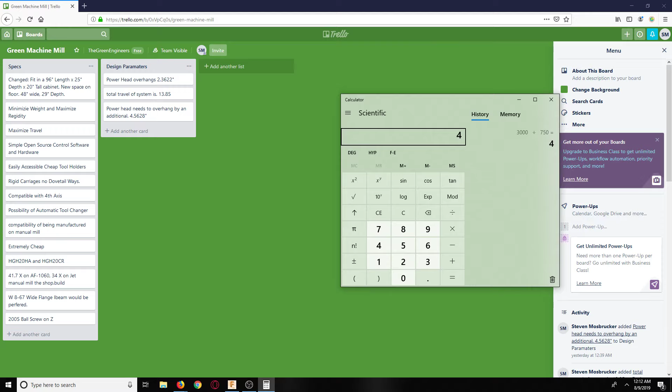And I think this power head, what was it rated at? Actually, at 3,000 watts or 4 horsepower. And that other one was 48 volts times 70 amps, which is 3,360 watts, which divided by 750 is a little over 4 horsepower, about 4.5. So obviously we'd need something bigger than that 3,000 watt to run the rest of the motors, so maybe even a 4,000 watt power supply.

I'm thinking even maybe like a big battery bank or something. But the next option, the transformer switching power supply - oh, these are 12 volt, that's too low. This one, like that one right there, this would be perfect - oh, it includes free shipping. So, oh, and then this is probably no - what is this?

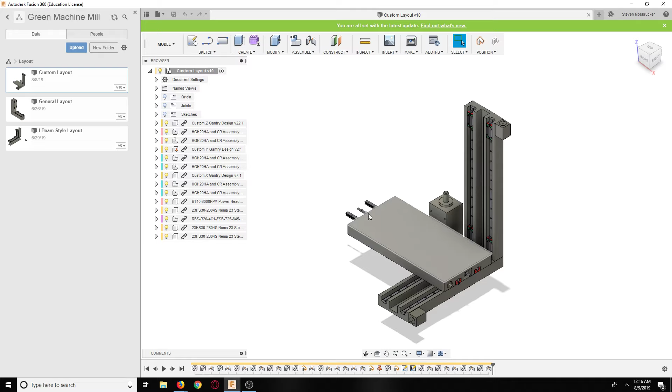Anyways, let's go ahead and look at what we could do to get that extra step over. I still haven't gone in and changed these yet, but we don't necessarily need that right now.

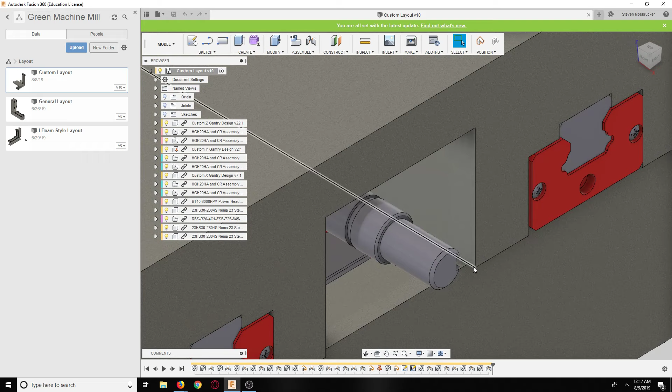For this guy, I would definitely go consult with maybe the HIWIN guys to figure out what to do here. Obviously I could machine something and stick it in here to hold the bearing and hold this guy, then have this stick out over here somewhere, and have this go up to this, with the bearing in here with some support, and then 2 holes drilled down here, and screw the block in there.

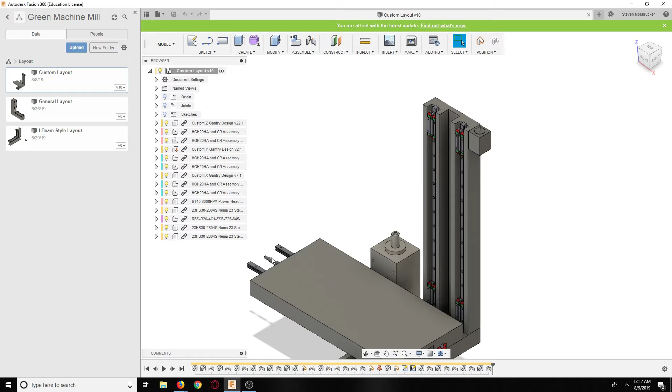Same deal here - this guy goes over here, and I could consult with them about what to do there, because I believe they're just regular steel. So even if I had to cut it and turn it down, that's fine also. It doesn't really matter, but I don't want to pay extra for increased machining time that I don't necessarily need.

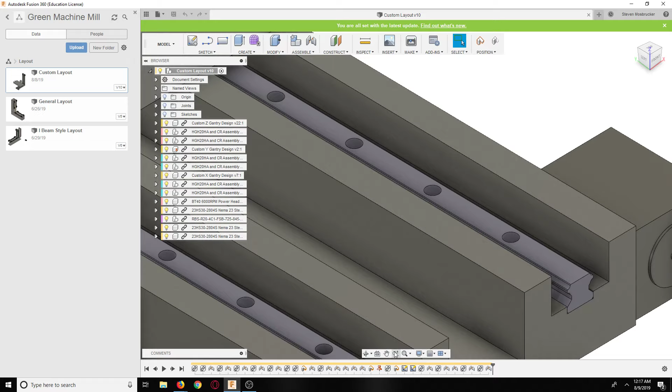Like I said, this needs to go up a little bit, because we have this, and we need these pieces to clear. Or we could come in and recess that 1/4 inch a little bit so it sticks out. It's not that big of an issue, and that will leave more meat. Actually, we'll bring these up - it'll leave more meat in here anyways.

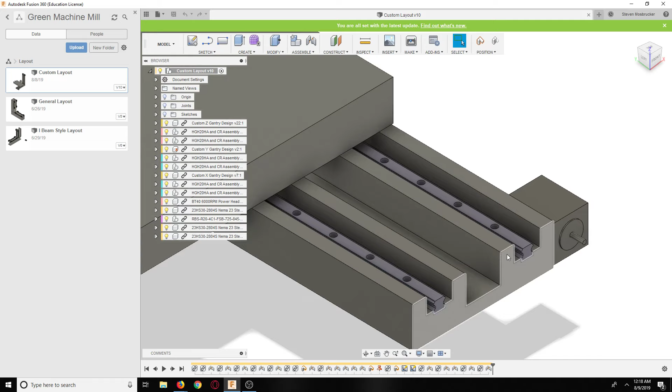So that looks good, let's go ahead and look. This is kind of touching right on - I guess this is the seal piece, so technically that will be that way, but it might be taller or shorter. I'm gonna have to ask them about the tolerance.

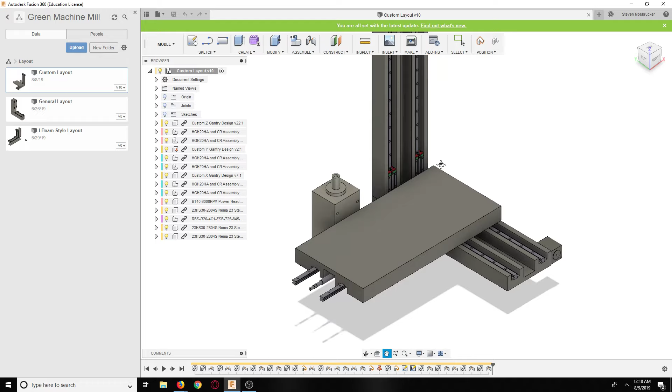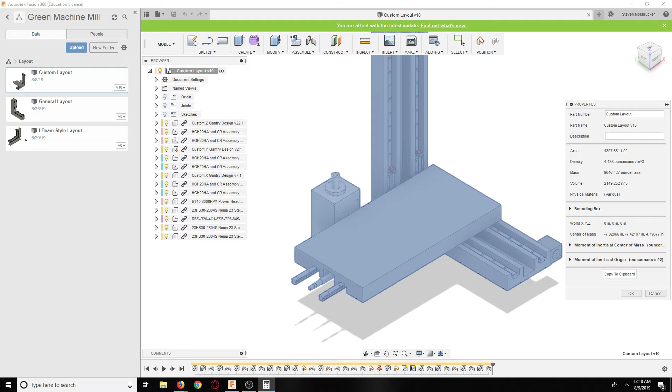So, here we are at properties. We're at 9,646 ounces divided by 16 ounces per pound, that's 602 pounds. Okay, so now we need another 4.5628.

So now the question is - a 2 horsepower spindle, including VFD, it's a 2400 watt spindle. So obviously we need to step it down quite a bit, and it's got way more bearings than we need, because really we don't need a spindle, we just need some sort of...

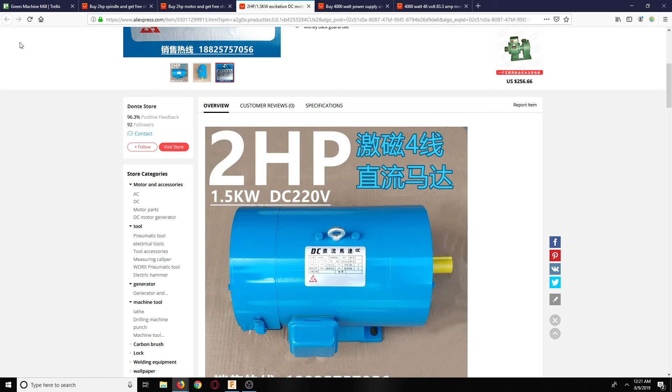That's not going to work. Let me bring this over. Oh, it's the same way. There you go, treadmill motor.

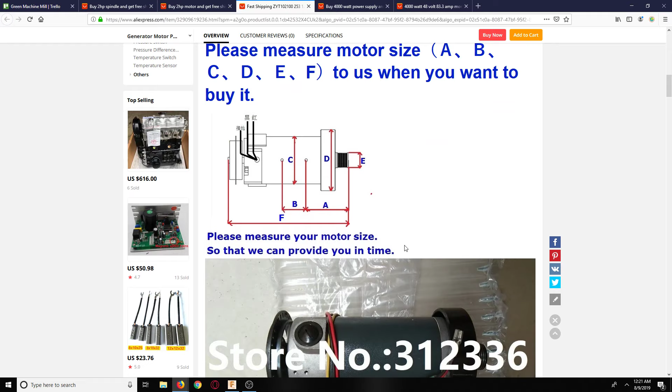So it looks like it just goes here, but I do like this idea. A treadmill motor, that's interesting. Where'd that go? That was there or something. That's only 1/2 horsepower.

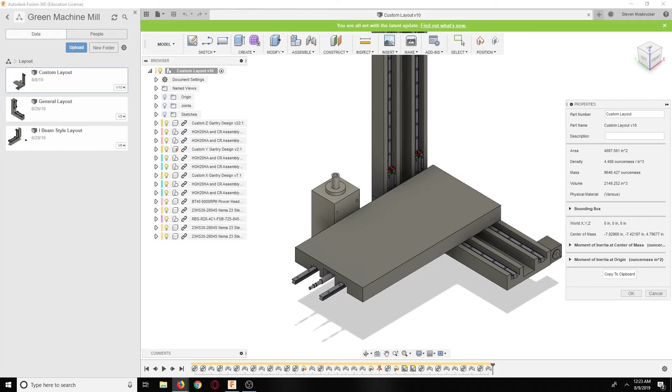Best is probably to use the spindle motor. I mean, we could design for that right now. Pretty much what we'll do right now is... because DC, I'm not going to do just a regular treadmill motor that's already DC if I could. What if I do an AC 2 horsepower motor?

So yeah, again, it's giving me the treadmill motor. But that spindle motor will give us a lot of power. But again, we don't need all those bearings in there. Okay, what about a 4 horsepower motor? Anyways, so a 4 horsepower AC motor's not coming up. Anyways, let's keep going regardless here.

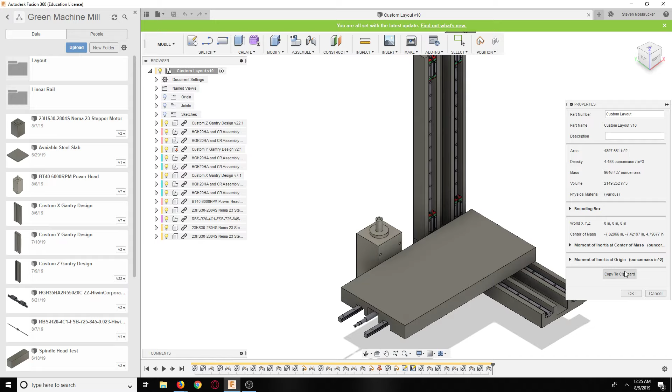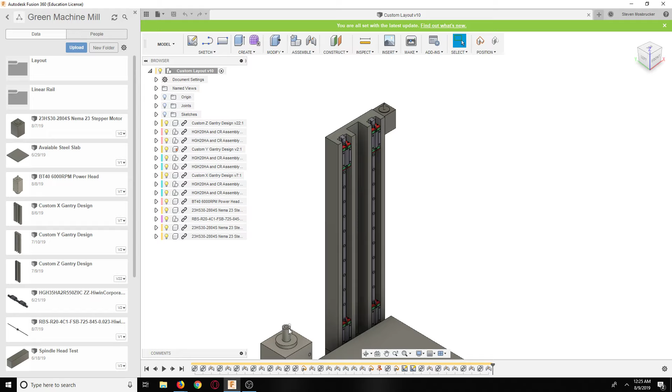So right now let's pretend that we're gonna use a spindle motor, or some other something off of a vacuum cleaner or something, and then driving this guy, because this guy's the one with all the good bearings in it, and we don't need to pay for 2 things with 2 different bearings in it. So let's look here - we need 4.5 something.

So let's just do that, and it's going to be the same size as this guy here, which is 9.843. So basically, it's going to be this way.

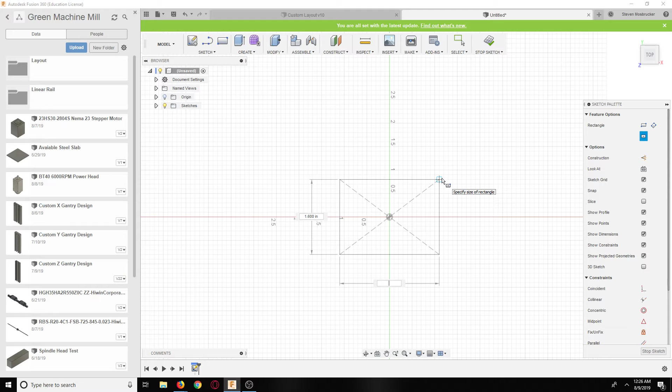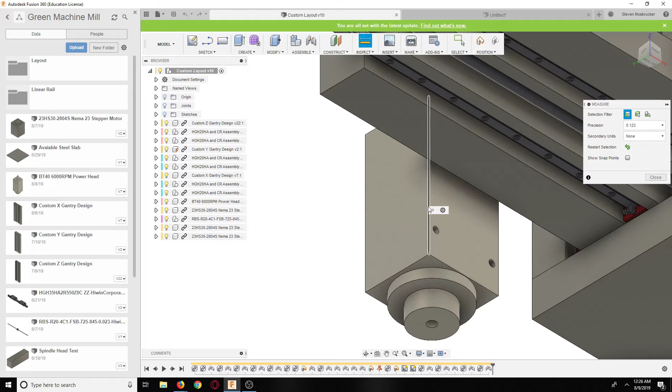Let's do 4.5628, and then width 5.197, 5.197, and then height again is 9.843, 9.843, 9.843.

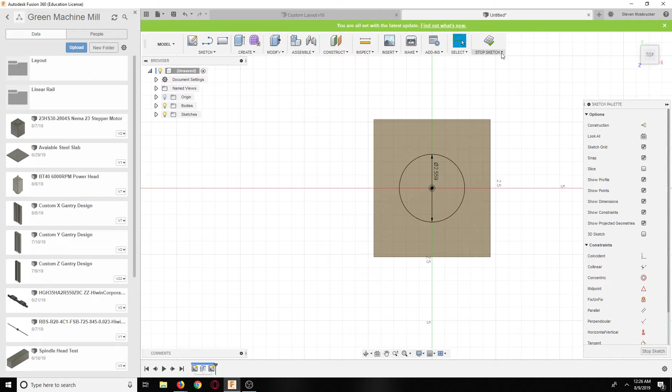And then let's punch a 60 millimeter hole in it - 65 millimeter hole, just for accurate representation. And then that's plenty of area to really suck all the energy out of that spindle, and a lot of support.

And again, so let's look at the 4 horsepower spindle - it's a 3,000 watt spindle.

A 3 kilowatt spindle with inverter from China. Oh man. But this thing's kind of cool.

380 volt. Well, I guess if I'm going to buy a spindle, I might as well buy this one, and then later on when I want to use a different one, when I want to go to the other system, I could just pop this onto some other machine, pretty much, onto a router of some type or whatever.

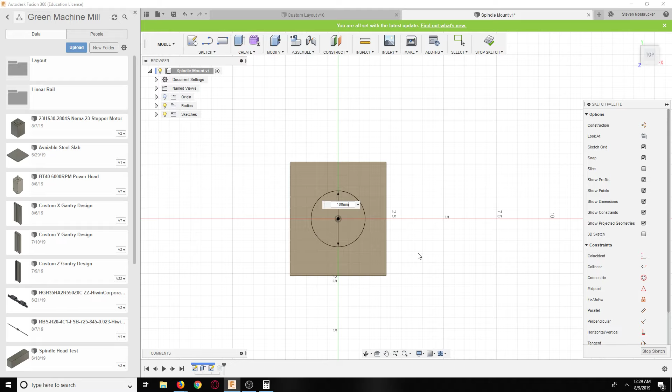It's about 3/8 on each side. That's a little bit of meat. These are... What about, I don't know, plus I don't want to go right up to that rating, that 4 horsepower rating. So let's drop it half. So give it a little bit.

Yeah, so these are 80s. So a 2, okay, so they're 2.2, which is, yeah, 3 horsepower.

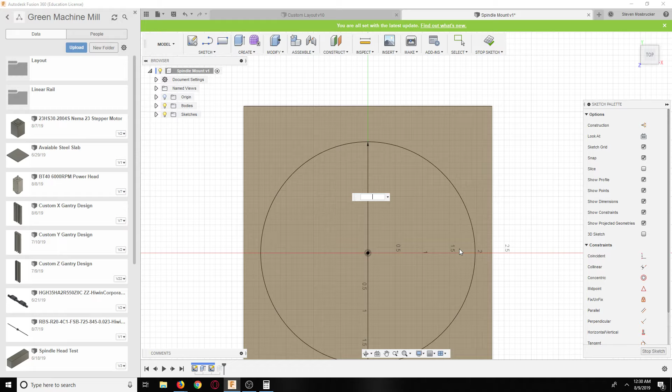And I can run off 110 or 220. I have 220 in the garage, but I don't have 380, so I can't run 380. So let's say 60. Or these are 80 millimeters. So these are 80 millimeters. There we go, that's better.

That's a decent sized spindle. Okay, so now with that, let's say how long it is. Oh, here we go, perfect. Look at this. Nice. You could do 220 or 110.

Ooh, runout less than 0.005 millimeters. ER20, 80, 230, CNC engraver, four bearing, 2.2 kilowatt, diameter 80. Total length sticking out is 12.

Okay, so let's use the calculator here. 12 plus 13.5 plus 191 plus 28 equals.

But there is one issue, and that is that this is going to have to be facing up, and then we have the cable coming out. We'll have to do something about hiding the cable, getting it out of the way, so this thing gets really close to the table. But I think that's not going to be that big of an issue. We could probably jerry rig something, even 3D print something that goes in there.

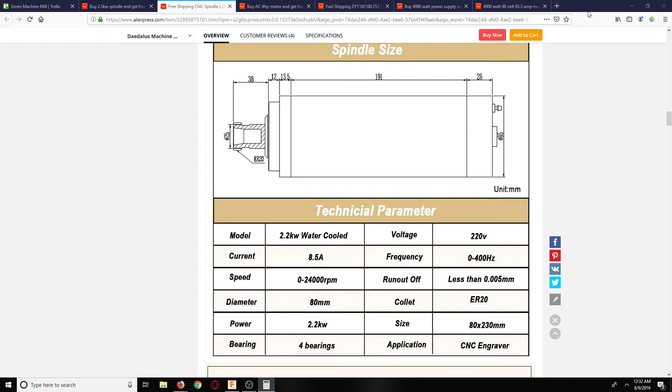Current 8.5, speed 24000. So obviously we need to step that down 4 to 1 or higher. Okay, but basically that's 244.5 millimeters. 244.5 millimeters. Oops. $244.5. Oh, look at that.

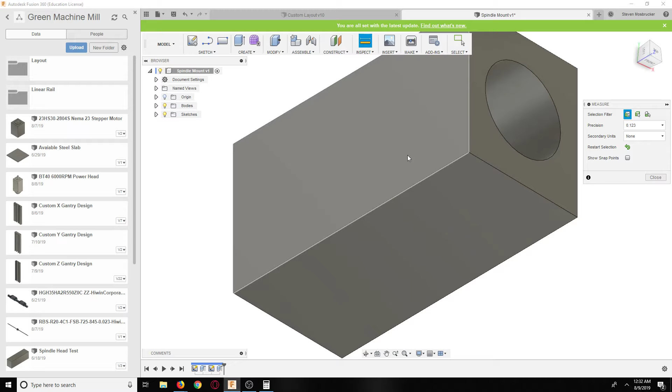Just under what we need. I think this is what, 9.6 something. Yeah, perfect. Okay, so let's design this here. We have 6 minutes, so let's design this as this is one of the first options, I think.

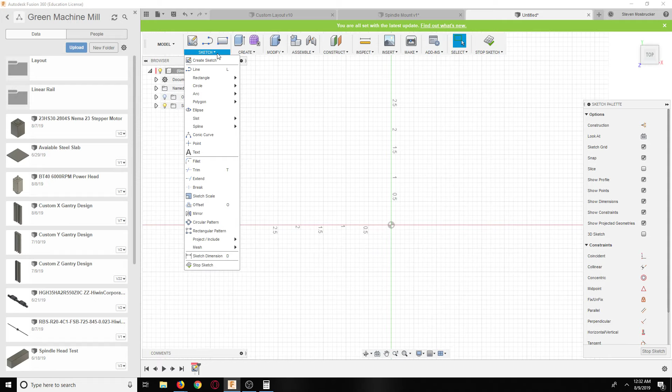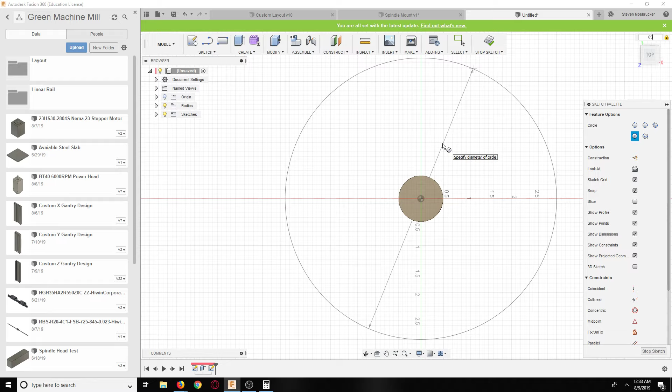Okay, so let's say here this is a 25 millimeter circle, 38 millimeters tall. Then you have a smaller circle. It doesn't say exactly how big it is, but it's slightly smaller than the overall. I'm going to say it's about 65 millimeters. And then that is 12 millimeters tall.

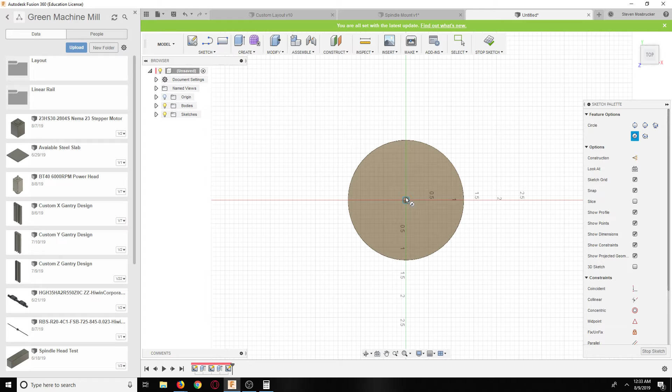Oh, this is the 4 bearing type. I mean, it makes sense. I guess it's definitely an interesting idea about using it later on another application.

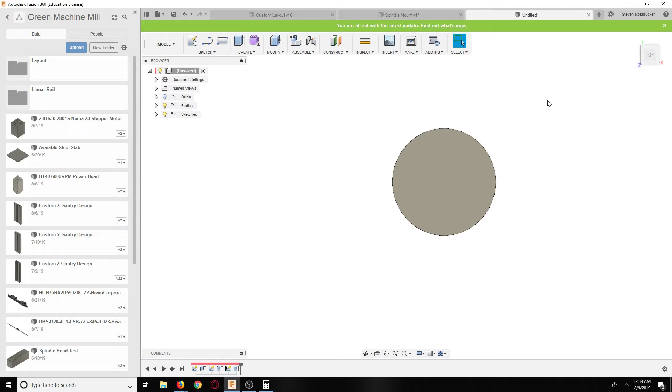This is 13.5 millimeters. And then this is going to go 191. And then this is going to be 28. Oh, this is water cooled. Oh, 80 by 230. I wonder why it says 230. Anyways.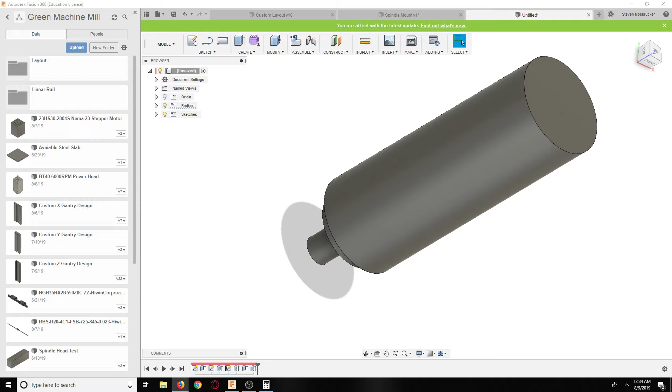Well, we might go directly with that other system, but you're gonna be in it big dollars. I would like to be making money with the system first before I do that, and then we could work on the brushless setup, and then we'll start working on a tool changer on the side while still using this guy, because you're gonna need a tool changer in order to do it, unless you get the spindle to go really slow, hit an end stop, and then use the brake by hitting the dogs, right? If it was an R8, it wouldn't be an issue, but it's not an R8, so that's not going to work.

So this is, let's go ahead and... Where'd he go? Where'd he go? Is this guy? No, there's guy. But this is, what is it?

272.71. It comes with a water pump. Again, I don't think we need water, but I guess the thing with the water is it keeps everything at a constant kind of... just use a 75 watt water pump, but still. And then it uses a small little connector.

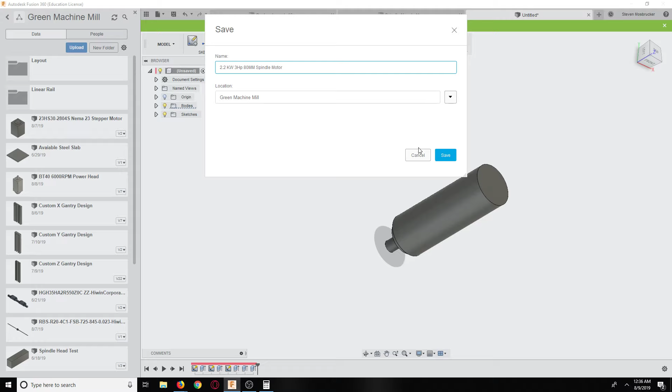Okay, so this is the 2.2 kilowatt, 3 horsepower, 80 millimeter spindle motor. Uses an ER20. Nice.

I mean, it's going to be roughly completely solid on the inside, most likely. So now, probably steel or aluminum of some type. It looks like possibly aluminum. Let's see if it says here. It says runout less than 0.005 millimeters, which is really small. 0.005, that's 2/10. So it'd be great for engraving after.

Water pump, clamp, features of the clamp. 4, a 6, and a 3.175. ER20, call it.

Does not have weight.

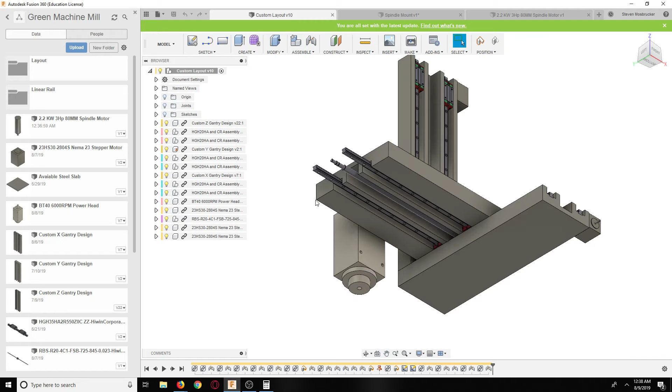Anyways, so let's go ahead and put it all together in this next minute or so. We are already over time, but that's okay. Oh, but this piece is actually going to have to be bigger. It's actually going to have to be this wide.

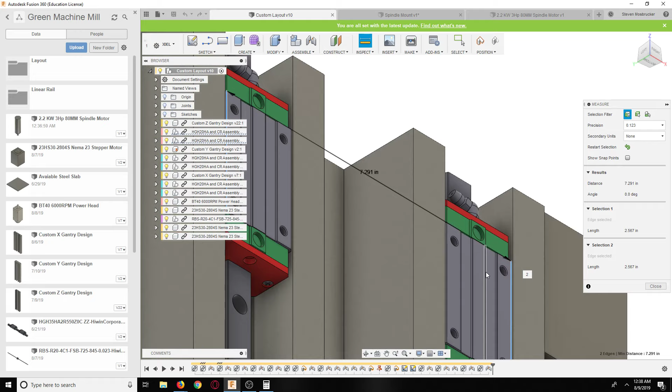Basically from here. 7.291. 7.291. There we go.

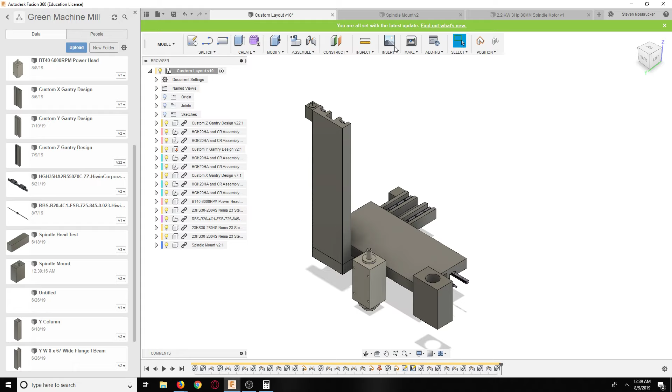Maybe even at some point, if I wanted to sell that spindle, it'd still probably be okay because I mean it's basically not taking much load.

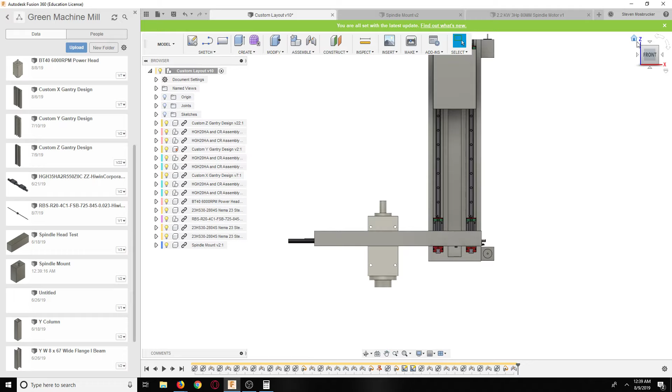Okay, so we got that there. And pretty much I'm going to go back here and hit this guy. Hit this guy here. Okay, looking good.

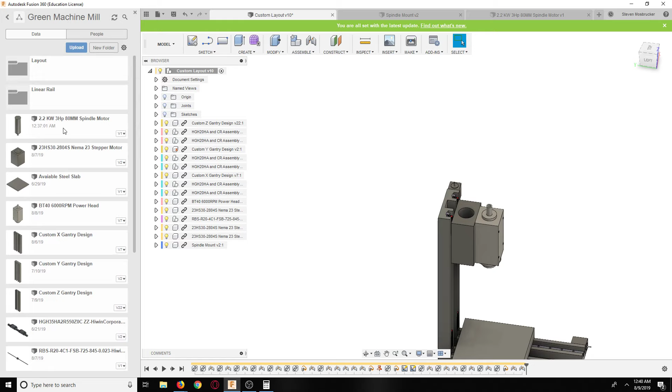And then we're going to drop our spindle in there. Something does not look right there. This is not in the middle. That's okay, I mean it looks like we did something wrong here.

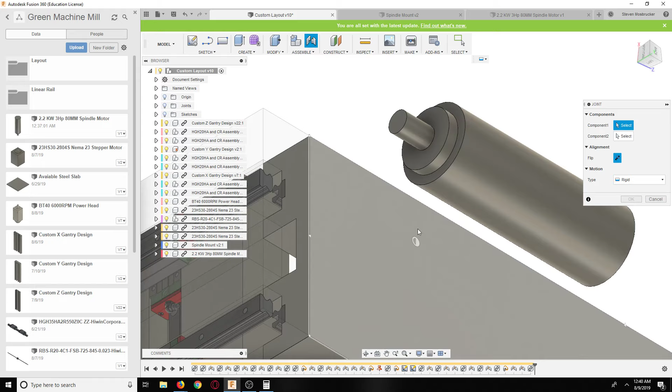We'll do the math right before we leave here, as it's getting close to where I usually hit the sack. So it's 12:40 at night.

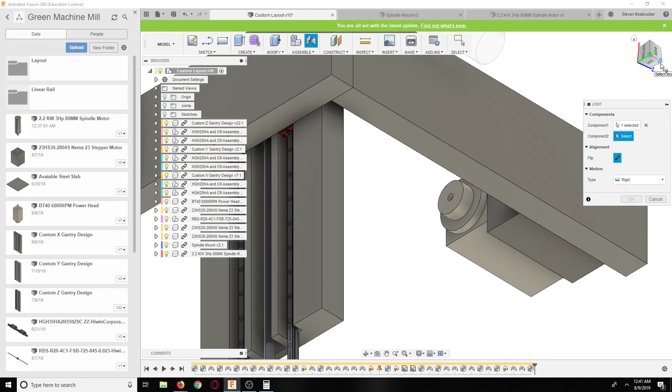Oops, wrong way. Okay, I forget that it's not actually pointing down, it's actually pointing up. Just like that.

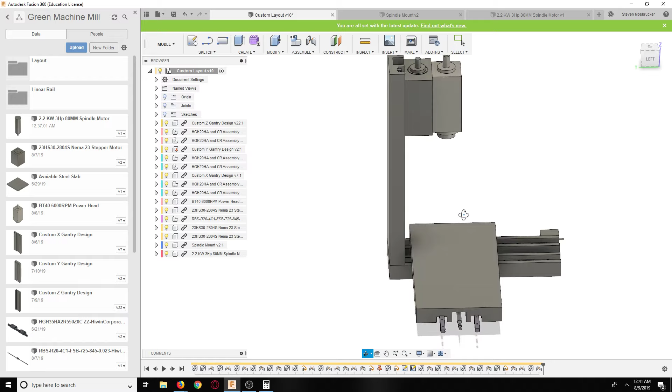And then probably some sort of cover, 3D printed cover or something over this thing. Okay, but this is definitely not in the center here. Because this guy's got to be way over here somewhere.

So again, the full travel, let's go back and look at that again. Total travel of the system is 13.85. So, 13.85.

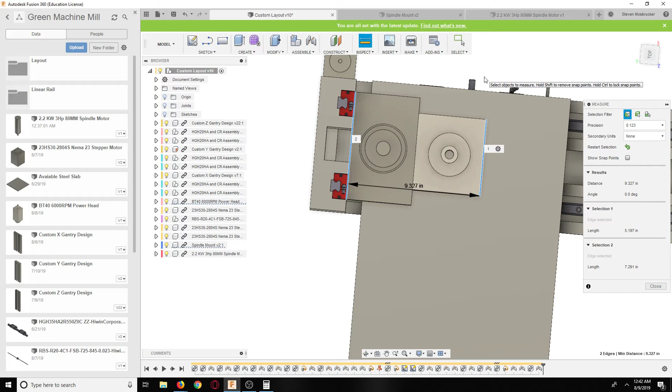Okay, so we're there, we're in the right spot, so I did my math wrong here somewhere. Because this is going to travel further. Because basically what it's going to do is it's going to travel half of that. So this is going to go this way. And this has got way more than 6 inches here.

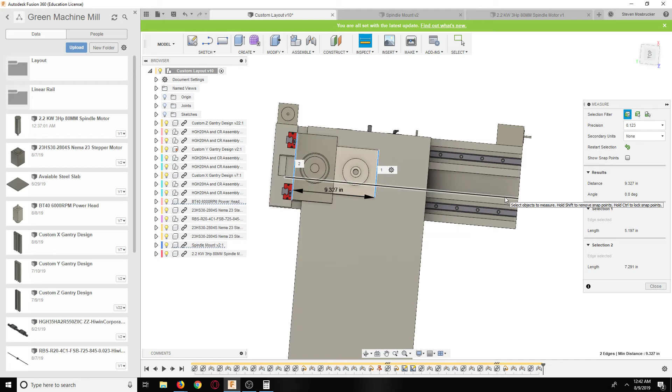Just on the model, it just doesn't look right. Okay, so let's double check this here.

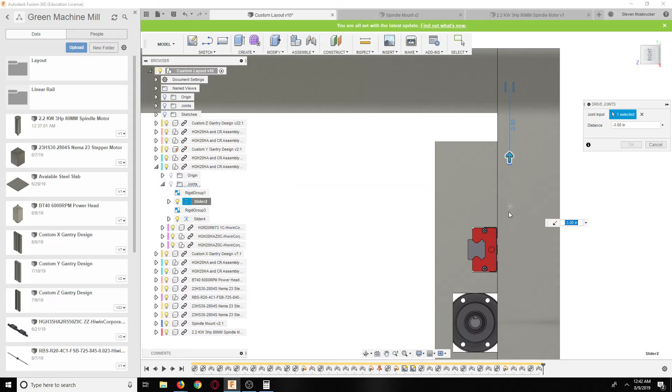So negative 1.9. Negative 1.90.

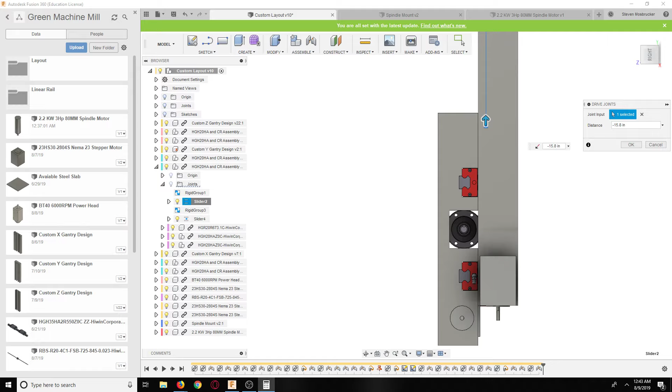Take that, plus 15.8 is 13.9. So this other one off by 50 thousandths. So, okay.

So basically that head has to be in the center of that. 6.95, 2.3622, 4.5878. Okay.

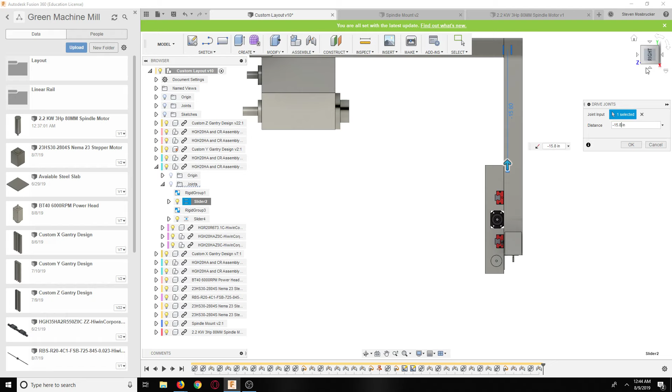Okay, so let's do that. Negative 1.9. And then what we're going to do is let's go ahead and drop the head really quick and see what happens.

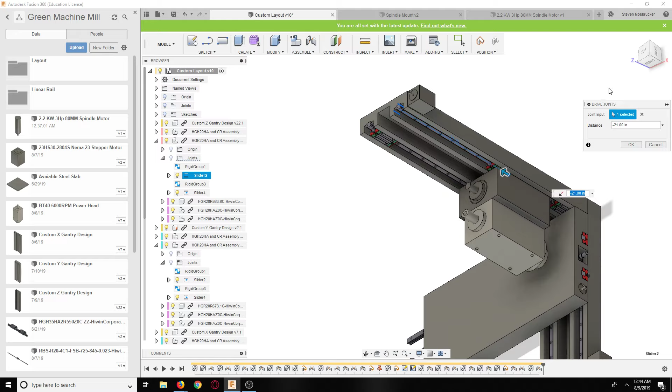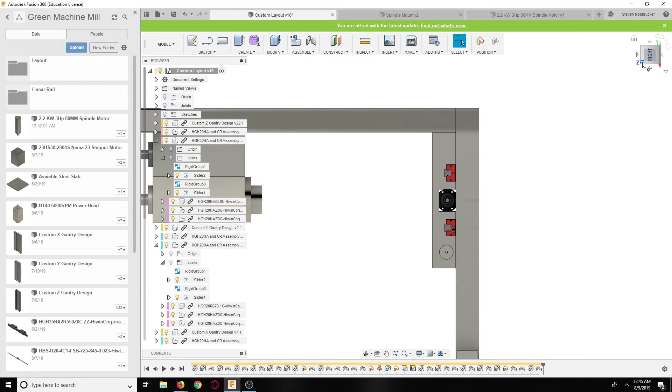So obviously we have an issue because basically it needs to be another half of this head, another half of this travel. It looks like it's directly over. So pretty much it needs to stick out an additional half here. So 14. Okay, so it needs to stick out an additional 7 inches.

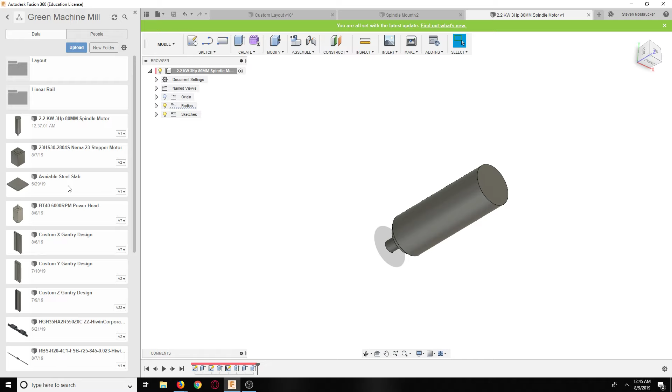Okay, so basically we're going to go in here, spindle mount, and what I'm going to do is I'm just going to add 7 inches.

That's a big boy. What are we talking about now as far as weight properties? That's almost 3,417 divided by 16. Oh, 16. It's about 200 pounds.

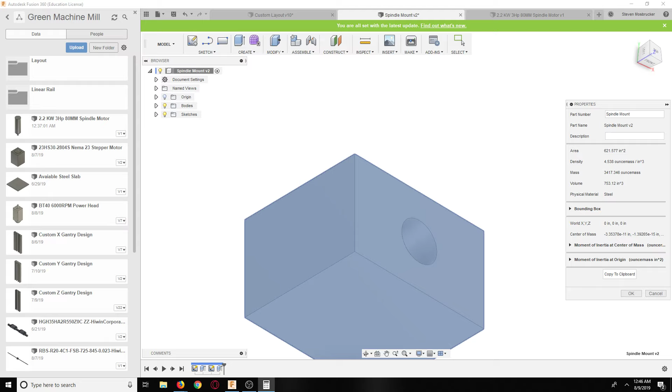Yeah, probably gonna have to make that one out of aluminum. But we're way over time now. Almost 40 minutes. Oh man.

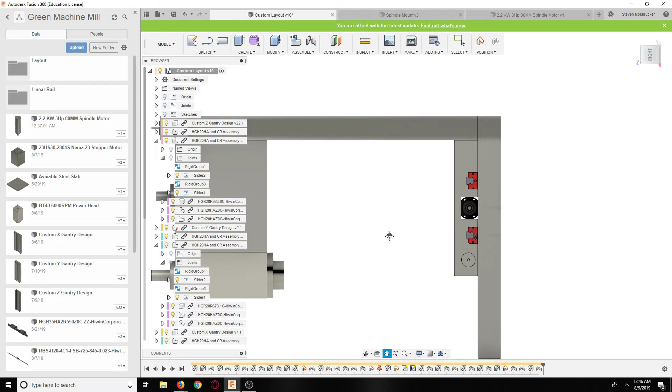There we go. Now it should be at the edge of the table. So let's drop it down. Yeah, there we go.

And now I'm curious also about what's the maximum travel we could get here. Negative... Okay, so basically that's it there.

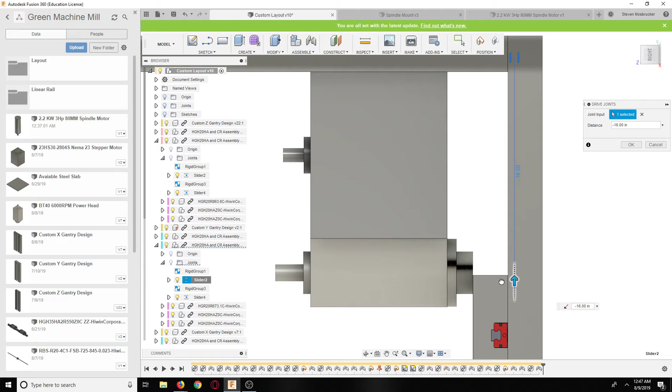Perfect, and it's a little bit past the head, but now that looks good. Alright, so now we got it.

Obviously, we're going to be way over what it's actually going to be because, again, I don't want that spindle head to weigh 200 pounds, because we also need to counterbalance this thing. So it's probably going to have some sort of pulleys that go in here and hold this thing up. So that's another thing we're going to have to do. Or it's going to have to be shock held. It's probably going to end up being shock, just because we don't really have a lot of space here.

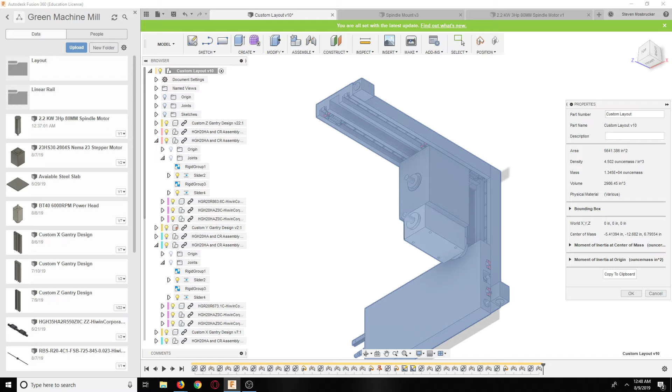Divided by 16, talking 840 pounds. Okay, I mean that's livable. All right, so we are almost at 1,000 pounds just for our machine. That's looking good. I think 1,000 pounds would be a good place to be.